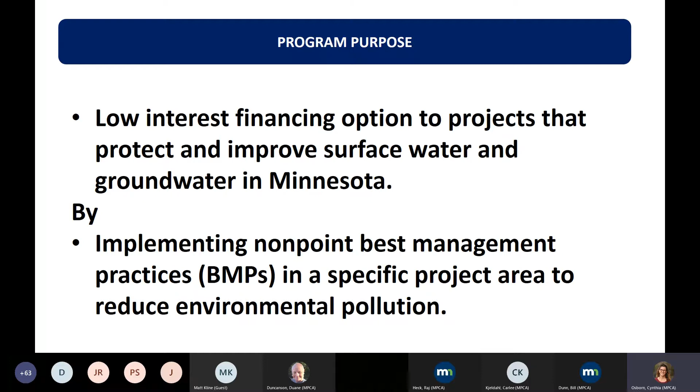We have low interest financing options. Actually, it's 0% interest right now to improve surface water and groundwater in Minnesota. It's available to local government units, so basically folks that can pledge their income behind it. I believe that the fancy phrase is their full faith and credit. But essentially it's cities, counties, townships, folks that can actually create a funding stream to pay it back. That is my short version of it.

We can't lend directly to individuals, but we can to the local governments. It is a revolving fund, so as the money comes back in, we can loan it out. It will act as a grant match. That may not be something that's applicable to you guys, but just in case, it is considered local funds. And we've distributed well over $60 million since the program began in the early 90s.

How it works is we can lend to the folks for a 3 to 4 year period of implementation. It always starts out with 3 years, and we can extend it to a 4th year if necessary. So depending on how you're going to address a problem.

So today we're talking about those private lateral pipes, and that's how my program can help you guys out. We can't help you with your street pipes. We can't help you with the public infrastructure, but we can help finance folks that have a lateral pipe from their home to the street that is probably not fundable through other traditional public funding mechanisms. So you would have 3 to 4 years to actually implement your project if you took out a loan. That would include the actual replacement of the pipe. It can include the testing, the smoke testing to see if there is infiltration in that private lateral.

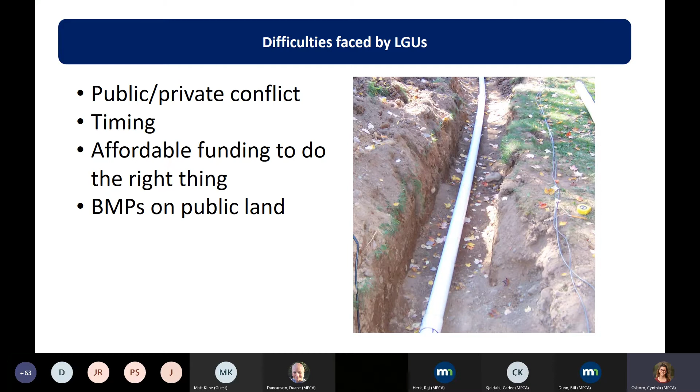Just to throw it out, wellhead protection might be something that would interest anybody that is doing some swaps or some exchanges. Most of those are in more rural areas, but that is something that we have been talking about. I'm just going to leave the slide in here, not waste a lot of your time on it.

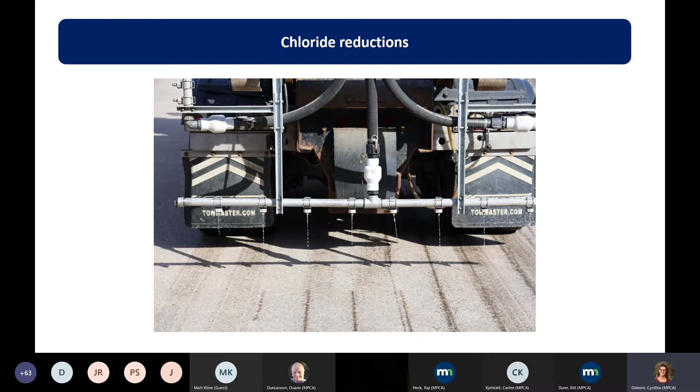Chloride reductions - this is also something that probably ties directly into your waste load allocations. We're seeing more and more issues with chloride in our surface waters. So if y'all have ideas that you want to try to implement for chloride, whether it's swapping out water softeners, applying less salt to your roadways, or getting equipment, that's something else I can help you with too.

So again, I just want to reiterate that this is a very flexible program. You can completely make like Gumby and make it fit your needs. If you need assistance with that, Kurt and I are here to help you with that. We can walk you through it. We can give you ideas. We can hook you up with other local government units to swap ideas, or if somebody is doing it already, we can help you connect.

Instead of continuing through a bunch of slides that walk you through the funding process, I am going to toss it back to you guys and offer you an opportunity to answer or to ask any questions that you guys might have. I am not a huge fan of PowerPoints and having you stare at a screen, so I think I'm more useful if I can answer any questions y'all might have.

There's a question in the chat: can this fund street sweepers and or Vactor trucks? Absolutely. So street sweepers, if it's an improvement - if you're already sweeping streets, you may need to show that it's better equipment for whatever reason.

For example, we have done a snowplow blade. Obviously, I think most communities in Minnesota have probably used a snowplow blade once or twice in the past. This one had a reason for being better - it was made to clean better, it was made to reduce salt application, and there was a little bit of research to back that up. So for example, we just might have to explain that this one has a vacuum and the other one doesn't, or this one's more efficient.

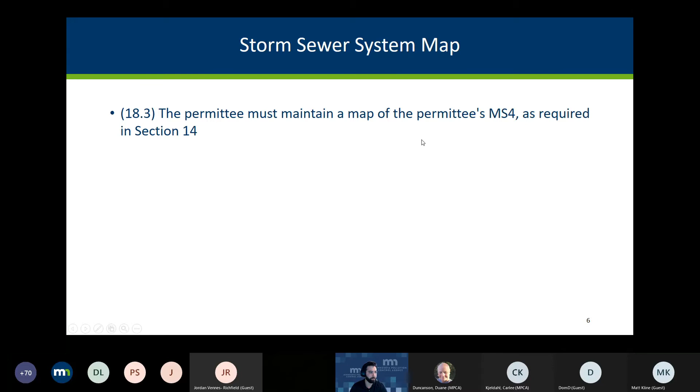You're required to develop, implement, and enforce a regulatory mechanism that prohibits non-stormwater discharges to the MS4, to the extent allowable under state or local law. This does not involve authorized stormwater discharges listed in 3.2. Your regulatory mechanisms can consist of contract language, ordinances, permits, standards, written policies, operational plans, legal agreements, and any other enforceable mechanism. That's the critical piece - your mechanism must be enforceable.

New to the permit is you need a regulatory mechanism that requires owners or custodians of pets to remove and dispose of feces on permittee-owned land. I'm going to post a link to our toolkit, which will have a model ordinance for pet waste, as well as other guidance documents and inspection checklists to help you get into compliance with MCM 3.

Also new to the permit is the salt storage regulatory mechanism. You're required to have a mechanism that requires proper salt storage at commercial, institutional, and non-NPDES permitted industrial facilities. This regulatory mechanism has to include that your salt storage is covered or indoors, located on an impervious surface, and you must implement practices to reduce exposure when transferring material. This includes things like street sweeping, containment, and diversions.

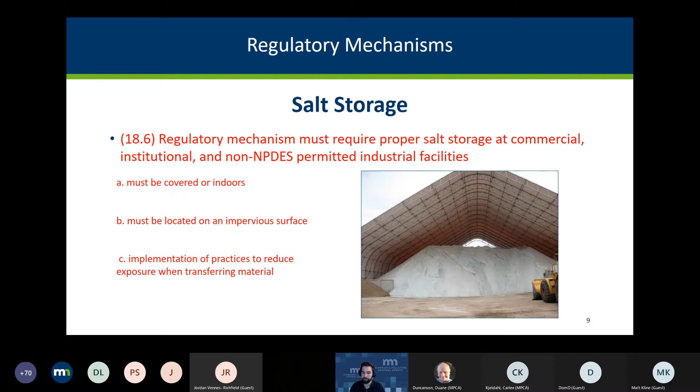18.14: permittees must maintain written enforcement response procedures, or ERPs, to compel compliance with the regulatory mechanisms. This will now include a description and guidelines for your enforcement tools, timeframes to complete corrective actions, and a name or position title of responsible persons conducting the enforcement. So a little added specificity to the new permit.

18.17 requires the permittee to document any enforcement conducted pursuant to the ERPs just listed, including verbal warnings. This must include the name of the person responsible, dates and locations of the observed violations, description of the violations, corrective actions, referrals to other regulatory organizations, and the dates the violations are resolved.

Under illicit discharge detection, the permittees must incorporate illicit discharge detection in all inspections and maintenance activities conducted in 21.9, 21.10, and 21.11. If you're unfamiliar with those requirements, those are your inspections of structural stormwater BMPs each calendar year, and your single inspection of all ponds and outfalls through the permit cycle.

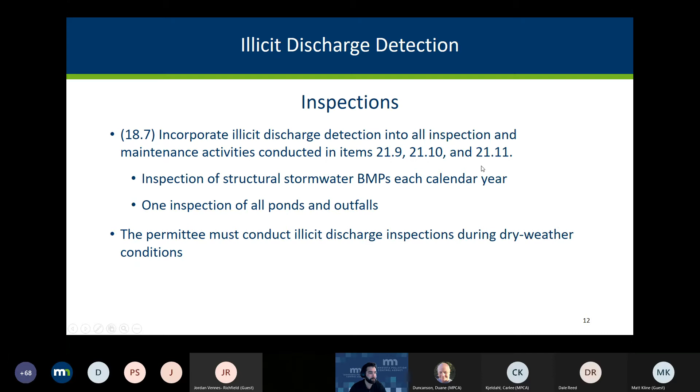So not new, but with a little added specificity, is that your priority areas now must be written or mapped. You must, at a minimum, evaluate your priority areas for land use associated with businesses or industrial activities, areas where illicit discharges have been identified in the past, and areas where there's a large storage of materials that could result in illicit discharges.

18.11 requires you, if you determine there are priority areas, to do additional inspections of those areas.

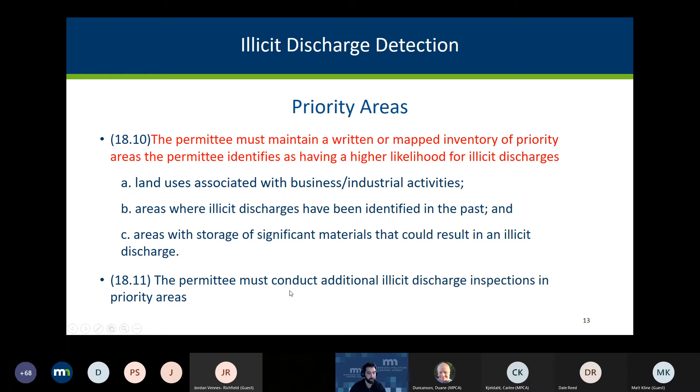You must document the following involved with illicit discharge: the dates and locations of your inspections conducted in accordance with 18.7 and 18.11, which were the last two slides. Reports of alleged illicit discharges and the dates of the reports and any follow-up actions. Dates of discovery, outfalls or other areas where illicit discharges have been discovered. The sources of those illicit discharges, if you are able to determine them, including a description of the responsible party, and any actions taken by the permittee, including the dates of those actions.

The permittee must implement written procedures for investigating, locating, and eliminating sources of illicit discharges. That's 18.12.

The added specificity here is that, at a minimum, the written procedures must include a timeframe in which the permittee will investigate a reported illicit discharge, the tools of the permittee to investigate and locate an illicit discharge, such as cameras, water samples, dye testing, cleanup methods available to the permittee, and the name or position title of the responsible party for investigating, locating, and eliminating that illicit discharge.

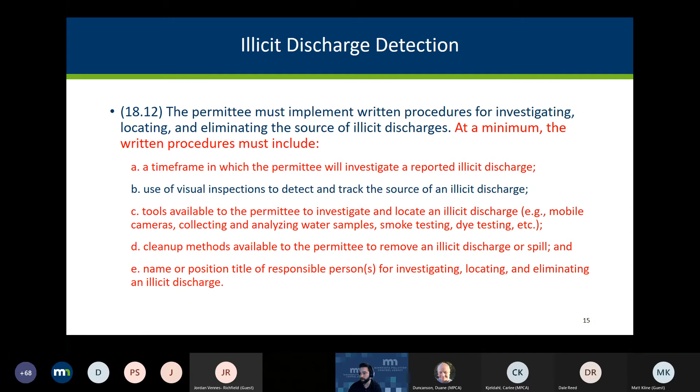The permittee must also implement written procedures for responding to spills, including emergency response procedures to prevent spills from entering your MS4, per 18.13. This has to include notification to the duty officer pursuant to 115.061. That statute requires you to immediately notify the agency of any discharge, accidental or otherwise, of any substance that could result in pollution to the waters of the state, excluding petroleum of 5 gallons or less.

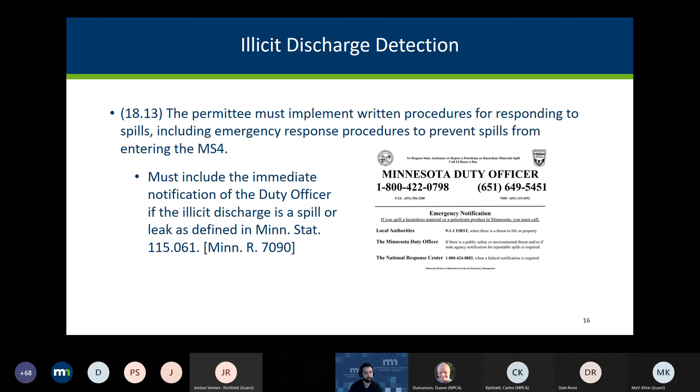Moving on to training, 18.8. Permittees must conduct training of all field staff on illicit discharge recognition once a year. There are two components to your training here: once a year, all field staff need training in illicit discharge recognition and reporting those discharges for further investigation. Your field staff includes, but is not limited to, police, fire department, public works staff, park staff, etc. Your training can consist of videos, in-person presentations, webinars, training documents, emails, and anything else you feel is appropriate.

18.9 requires the permittee to give individuals training that is applicable to their responsibilities as they relate to the IDDE program. Individuals include people responsible for investigating, locating, and eliminating illicit discharges, and any enforcement that comes from that. Those individuals must receive refresher training every 3 years. So if individuals are solely responsible for enforcement, they would receive training on how to conduct enforcement and get a refresher every 3 years.

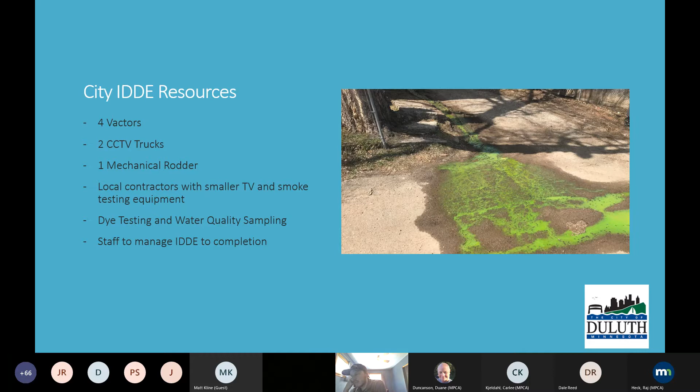And then, of course, we've got staff to manage all of this and perform all these actions. This doesn't include actual construction equipment and staff we have to follow up with instances that are on publicly owned infrastructure.

So this happened on a street out in East Duluth. As I mentioned, this particular instance really used all of our resources at one point or another.

It showed that we really went down the typical path first, what we expected it to be, but persistence is key, especially when really challenging situations come up. Engaging with the community is really key, and has been in the past, because those are the folks that live there and know what's typical and what's different now. You're kind of looking for the source of why some of these things are happening, and you never really rule out possible scenarios.

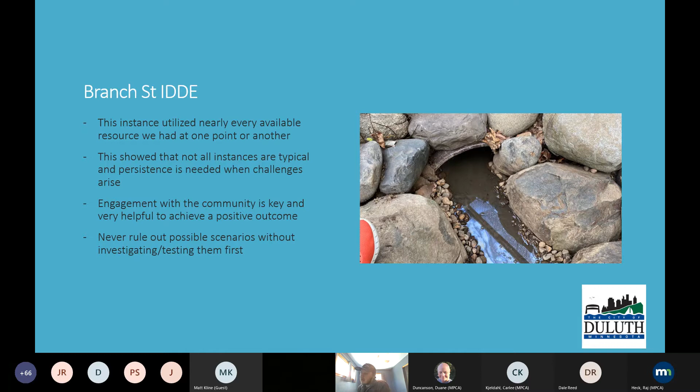So, like I said, there's going to be a bunch of GIS images to kind of tell a story. Not a lot of words, maybe a lot of me talking.

If we can see my cursor here, this is a blown up view of the storm sewer infrastructure in this neighborhood. We're going to be looking in the center of the screen here. We first got a call from a resident at this location that they had a culvert in their backyard with some questionable smelling discharge coming from it. So, kind of typical.

We always try to respond to this stuff immediately. We got there that afternoon, it was a later afternoon call. The first thing we noticed is that we didn't have any sort of record of any culvert or storm sewer infrastructure around this home.

The storm sewer infrastructure is highlighted here in blue on our GIS map, and the green is our sanitary sewer infrastructure. So there were some questions right off the bat, like what is this culvert or pipe even here? We don't necessarily have record of it. So that's where talking to the neighbors, the community members that live there, comes in.

One of the neighbors actually shared this with me, which is really amazing that they had this. They had a drawing of this pipe that apparently collected water behind their home and drained it underneath their home, underneath the city right-of-way and road, and discharged it back down into their neighbors.

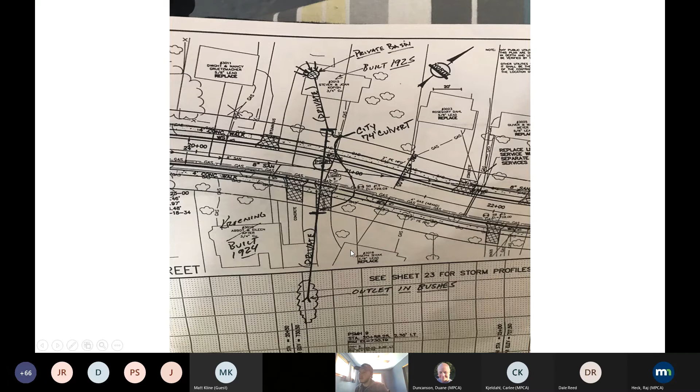You can see here there's this hole behind this person's home where this catch basin is. So all the runoff from their driveway and everything is actually running underneath this home and across the right-of-way, discharging in the backyard of the folks below them, which is obviously not an ideal condition.

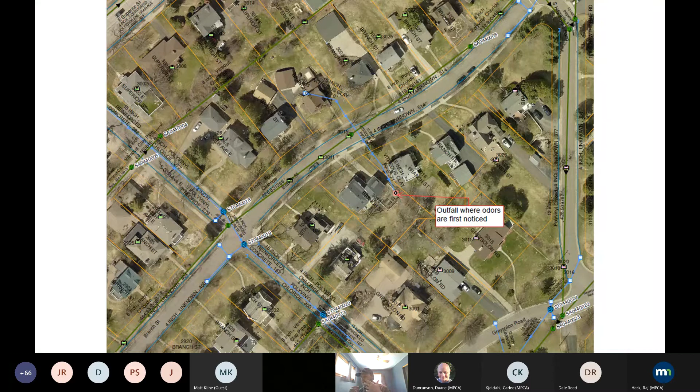So showing this again, this is the outfall of the pipe that this resident had called us on. They explained this just started happening, it was pretty new, and they're intimately involved with what's coming out of this pipe since it's in their backyard, actually in their garden. These folks are incredible gardeners, and this pipe is right in their backyard.

But they said something was different this time, and I agreed, it didn't make sense. It didn't seem like much at first, but you could see this is the water coming out of that pipe, and it's got an odor to it, smells of sewer. We took a sample, and the results came back with elevated levels of fecal coliform, so we were fairly positive it was sewer.

So we started going down that path of deductive reasoning, like what's next and where could this issue be. Going back to the GIS here, one of the first things we noticed is we've got a public sanitary sewer that crosses it, and we also have a sanitary lateral cleanout right in this folks' backyard, in their garden too.

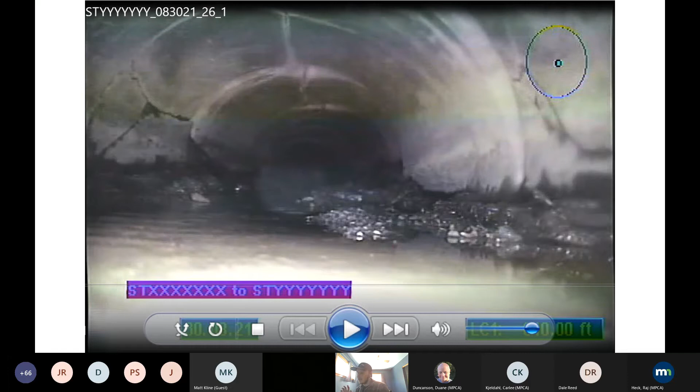And this is really where the rubber met the road. So we drove all the way up from the end with our camera, parked in their yard with our truck, and saw water dripping at the sanitary sewer crossing.

So now we've checked all these boxes, including the sanitary sewer, but we've still got water coming in here, and we're just like, where did we go wrong? What did we miss?

Because it feels like we certainly have missed something. This is what I mean by dripping. This is a picture of that actual location, which I've got marked on the map. We're in the storm sewer pipe right now, facing upstream, coming up from the home where the outfall was.

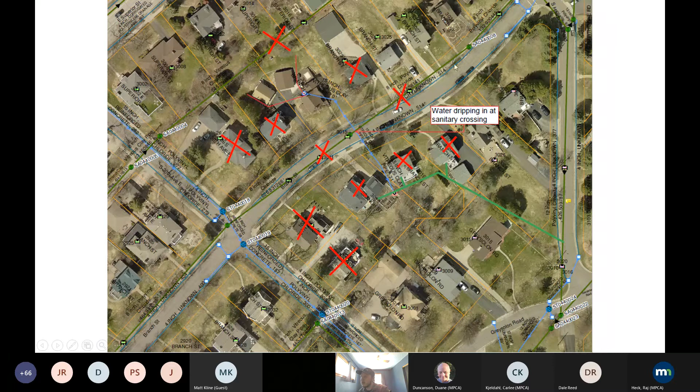What you can see in this image is that the sanitary sewer pipe is actually partially embedded within the storm sewer. To our best estimate, the contractor, when they replaced this sanitary sewer about 20 years ago with PVC pipe, didn't know that an existing storm sewer crossing between the homes had existed. When they laid the pipe, the elevations didn't work out, so they notched it and put some mesh in and made a construction joint, which had then failed.

But that still left us like, well, the water's not coming from that sanitary sewer, so where is it coming from? We knew there was water coming in, and it was a bit more today because we had just gotten some rain. So we're like, if we're going to find it, now is when we're going to find it.

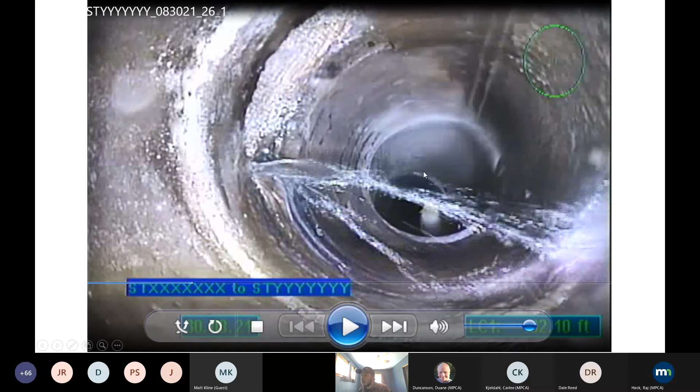So what we actually ended up doing is, since we knew we were facing upstream, and this water's coming in on the left-hand side, we just started walking. We knew it was somewhere in this direction because the water was coming in from here, along the sanitary sewer.

So we just started opening up manholes, all along Branch Street here, the storm sewer, the sanitary sewer, and walking. We actually ended up finding, in the alley up above, a block and a half over, a backed up manhole in one of the only lines we had televised to this point.

And we found out that there was a hole here, and just downstream of there was a blockage caused by flushable wipes.

So what was happening is this blockage had kind of happened in this sanitary sewer, and it was backing up. I can't stress how the series of events all led to themselves here. The blockage was just enough to allow enough water by in this sanitary sewer that we didn't think it was an issue when we televised this line, but also not so blocked that it would push out of the cover here and flow onto the street.

There just so happened to be a hole in the side of this clay pipe that the water could exfiltrate out into the soil on. Then it just so happened also that there was a newer storm sewer that ran down the street, and a newer sanitary sewer, both bedded in gravel or some granular backfill material. That gave a relief point for the exfiltrating sewage to flow through the granular backfill over 400 feet, to finally hit this mesh in this culvert, and slowly drip into the backyard of these folks.

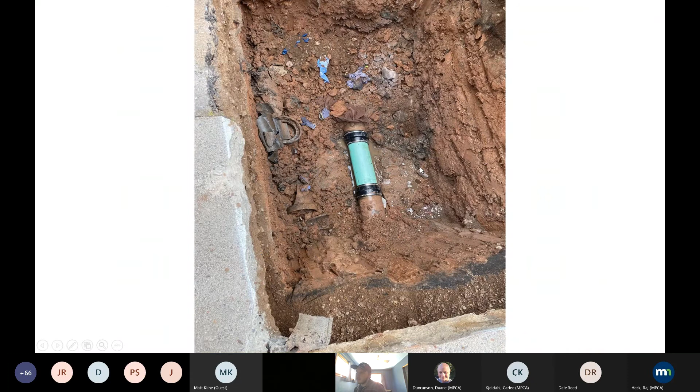This is a photo of the fix we did up in the alley on the sanitary sewer. It's just a small section of pipe that was broken. And here is what we dug down and ended up finding on the cross culvert for the storm sewer, and this is the sanitary sewer.

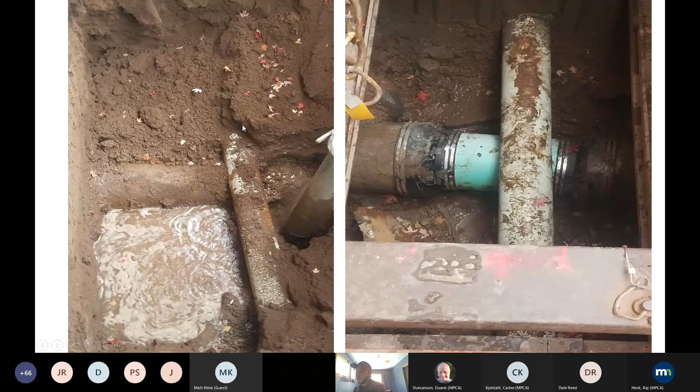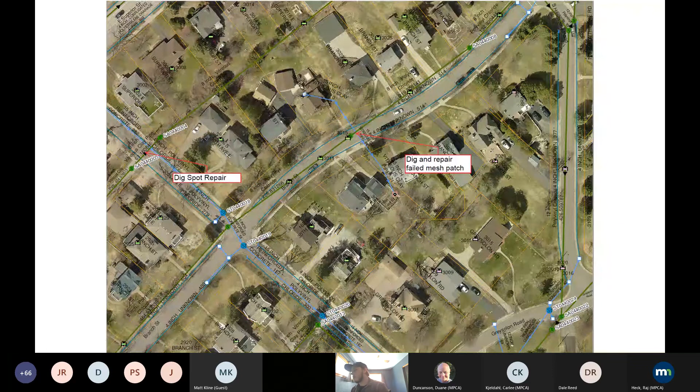We were able to replace it with a similarly sized PVC, which is smaller diameter, and get those clearances. But now, looking forward, we're going to have this lined with cured-in-place pipe liner. We're also looking to see if we can work with the homeowners and get a project together between the city and the homeowners to replace this entire thing, because it's in poor shape and was the subject of an instance like this.